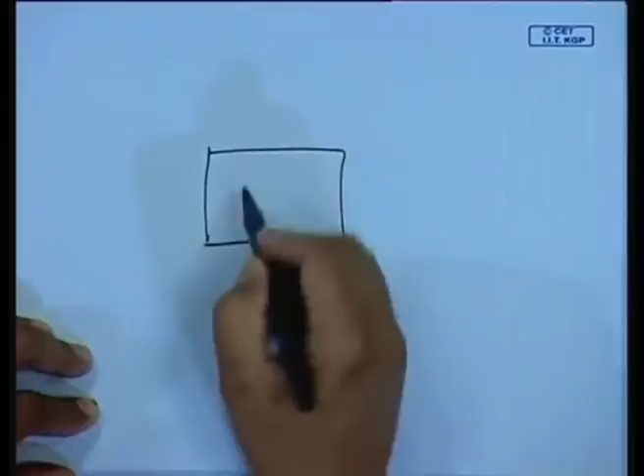I would not like to have a rough machined surface, because my turning machine cannot run at high speeds, so I cannot have a smooth finish. There have been intermittent speed fluctuations in my machine, so these marks are going to stay in your machining process. So even a simple lathe machine has to be taken care of, otherwise if you are doing a machining operation on that lathe, the machine's quality is going to reflect on the workpiece.

We take it for granted that you have a nice machine. Somebody may say this machine has a bad gearbox. Somebody may say, well, what has the gearbox got to do with your tool? You have a new tool, so you should be having nice machined surfaces. But people do not understand that if you have a bad gearbox, there will be backlash and there will be a speed fluctuation, and that is going to affect the cutting process. They are all interrelated. As engineers, I am sure you will appreciate much better that all these dynamics of the machine are interrelated, and they will eventually reflect in the final product which you are producing from your plant.

I would like to have the plant, once up, run till its maximum useful life. And of course, if all my machines are running at their best OEM specs, I will have increased production capacity. I have seen many plants that never run to full capacity because they are not sure about the design capacity of the machine. They would have bought a new machine that says it can be loaded up to maybe 100 horsepower, but they will not load the machine beyond 80 horsepower.

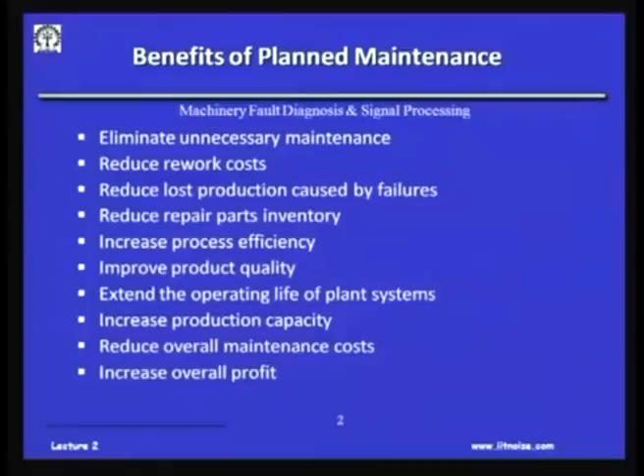They would say, oh, I would not like to reach the high levels because it may damage my machine. So these are uncertainties. They will say that the machine has not been maintained, so I would not like to load the machine and create excessive wear and tear. So again, if this maintenance is planned, like I was saying, the planned downtime, planned inventory, it is going to reduce the maintenance cost.

Reduction in maintenance cost means increasing the overall profit, and the guys in finance will always be happy if the cost for manufacturing a component comes down, because that brings about overall production increase and revenue to the company, and that is what everybody strives for. Why are we doing maintenance? Because I would like to have high productivity at low production cost or low maintenance cost.

When a machine is initially commissioned, the failure rates are pretty high. This could be because of wrong OEM specs, wrong integration, installation defects, not being able to understand the machine, not able to understand the performance of the machine, operators not properly trained. So these are issues

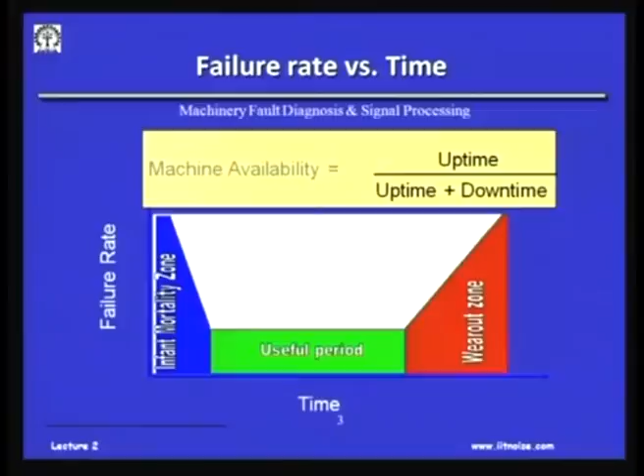There are three very important types of machine maintenance. The first is preventive maintenance, also known as periodic maintenance. The second is predictive maintenance or condition based maintenance. And the last is actually no maintenance, known as breakdown maintenance or reactive maintenance.

In this course we are going to focus on the second one, condition based maintenance. I had told you in the first class that we are gearing towards instrumentation, signal acquisition, data acquisition, and analysis, all because of CBM. I need to know the machine's condition by monitoring its vibration, temperature, pressure, etc. So we need to track fault conditions. We will be focusing on condition based maintenance in this course.

But I thought I should tell you about preventive maintenance or periodic maintenance. Periodic maintenance means I will regularly follow a schedule of maintenance. There will be a fixed time interval. No matter if the machine is bad or good, I don't care, I will just religiously maintain and replace the spares so my machine is always up and running. Particularly in defense, they do this kind of periodic maintenance for strategic reasons, but that doesn't mean they don't also do condition based maintenance.

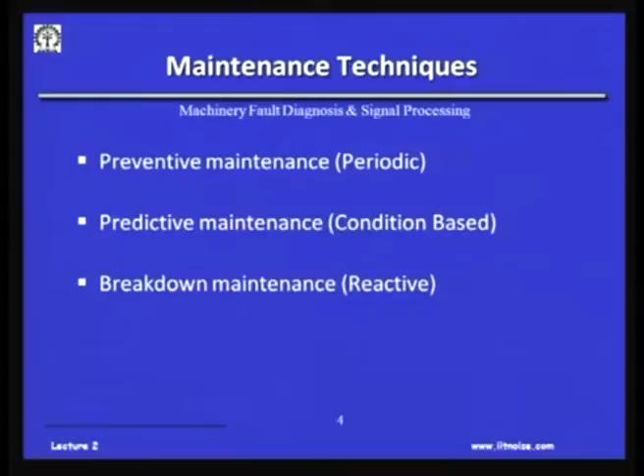Another thing I will tell you, as I mentioned earlier in our meeting: like a doctor is no good to a dead man, similarly a maintenance engineer cannot maintain a machine which is already dead, which is not running. I can at most repair it, but I cannot maintain it. A machine has to be running so that once it runs, it gives us signals. If a machine is not running, there will be no vibration, no noise, no heat generation, so I cannot possibly do CBM on that machine.

At most I may look into the manuals, look into the design, and do a repair, but to implement CBM, a machine has to run, so that it gives the required signals and I have the instrumentation to capture those signals. I'm stressing the words signals and instrumentation for condition based maintenance, because to implement it I need extra investment, even if the machine is as new as one I just bought today. To implement CBM on it, I have to make that extra investment from day one, to cover the instrumentation and the analysis unit.

I have skilled manpower to analyze the signals acquired from the machine. As opposed to the last one, the breakdown maintenance or the reactive maintenance, this is actually no maintenance. I do not do any maintenance on this machine. I can afford to lose the machine if it goes down.

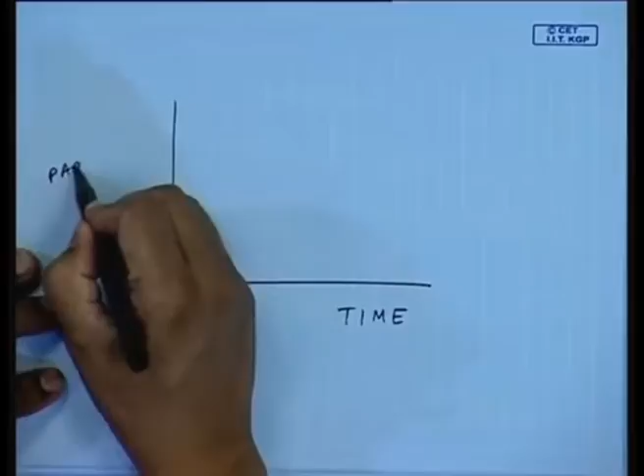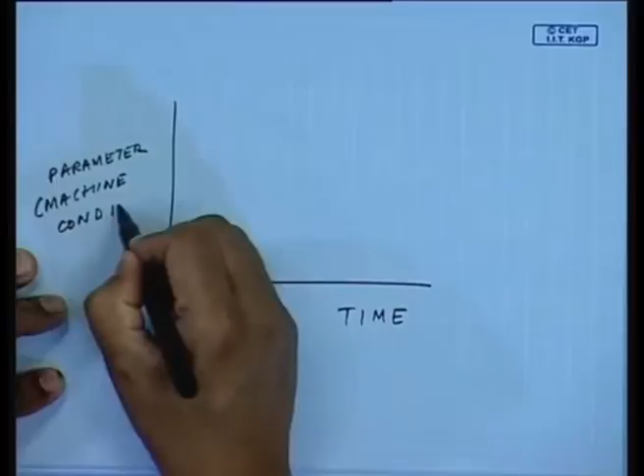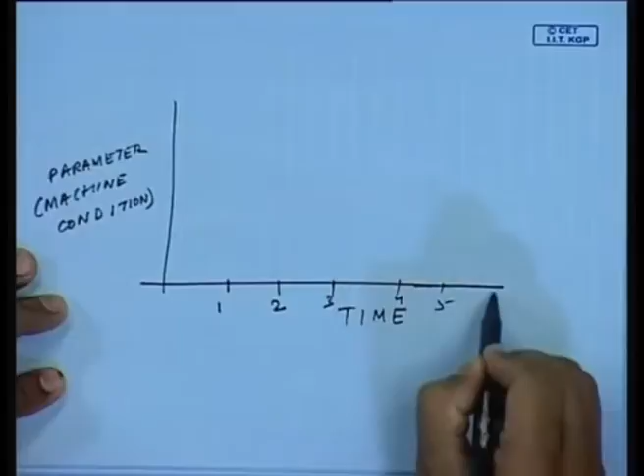Say I have a parameter which tells the machine's condition, for example over intervals of time - 1 month, 2 months, 3 months, etc. So this is time in months. I have measured this parameter, and second month onward, slowly I see this is happening.

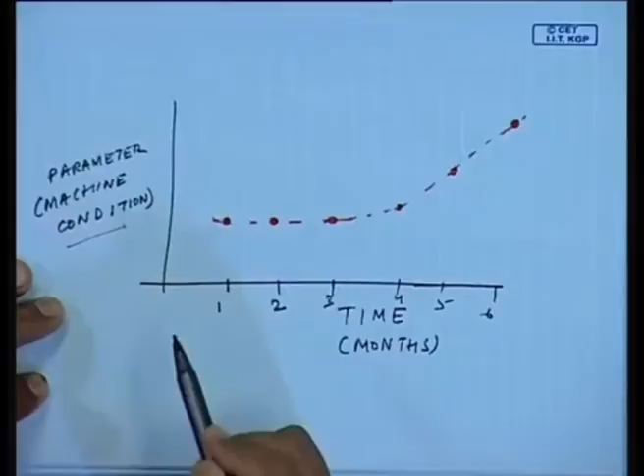So if I was trying to do a trending of the machine's condition towards the 4th to 5th month, at the end of the 5th month, as a maintenance engineer I would be getting worried - something is behaving abnormal with this machine, and why is this parameter going up?

So I know, well, by the 6th or 7th month I need to have a major repair or study into the problem in this machine, so that I may already have certain critical spares available by the 6th or 7th month - rather than storing these critical spares from month 1. If I know it takes only 1 month to get these critical spares, I can plan by the end of the 5th month to get them. That is one way of looking at it.

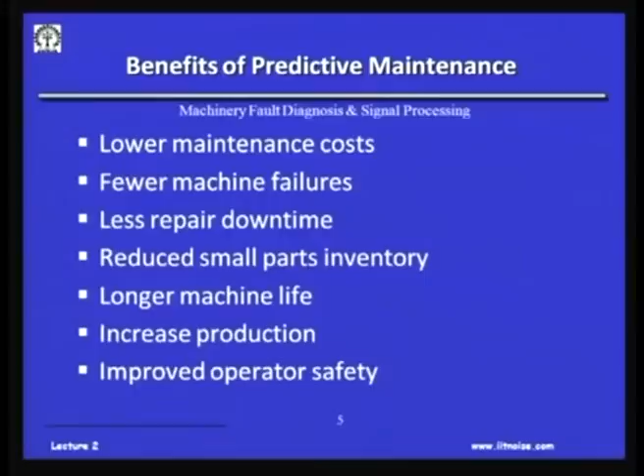And then I can be prepared that my machine is going to have a downtime. I'll give you an example here.

Suppose we have a festival of Dashera, wherein we give holidays to our workers. Imagine at the peak of Dashera, my machine which is supposed to be producing, and there is high demand, has to take a serious breakdown. So I have to pull out my workers or engineers from their Dashera vacations or holidays. I have to pay the workers overtime because I have to pull them out from a scheduled holiday, and I have to have the spares ready. So all this adds to cost.

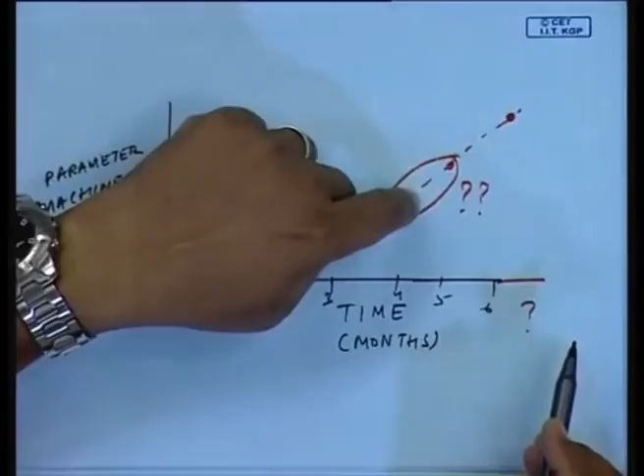But had I planned it earlier, because I know the machine's condition, at the end of the 4th month I know I'll have a high production demand toward the end of the 7th month. This is the time wherein I can take a repair instead. So these are the cases wherein I can reduce my inventory, and if I do a proper planned downtime, I can increase the machine's availability and production.

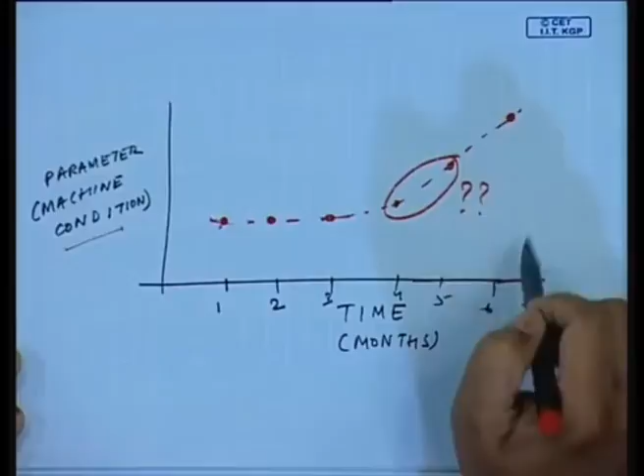And if I know this machine is going to have an abnormal behavior, I would not like my operator to be very close to the machine. I have had a case wherein we have a plant very close to Kharagpur, in Haldia, of a large FMCG manufacturer.

One night the plant engineer gets a phone call that the gearbox blew apart. This is a plant which produces detergent. Detergent production is very similar to cement manufacturing - they have a mixing process, a rotary kiln that rotates at a very low RPM, and it's heated at one end. So if you have a motor running at 1500 RPM and this kiln rotating at 2 to 3 RPM, you can imagine the amount of reduction being brought about in this gearbox.

This gearbox was very critical to that detergent plant. And this gearbox, for reasons we will find out later on—in fact that's a case study I will discuss towards the end of this course—blew up. Imagine if the operator was standing next to it. Unfortunately, it was in the late night shift and nobody was there. Imagine if an operator was standing next to it, it would have been dangerous. So if we know the machine's condition, we know when it is safe to go closer to the machine while it's operating.

So all these are the benefits of predictive maintenance, and in this course, as I was telling, we will be focusing more towards condition based maintenance.

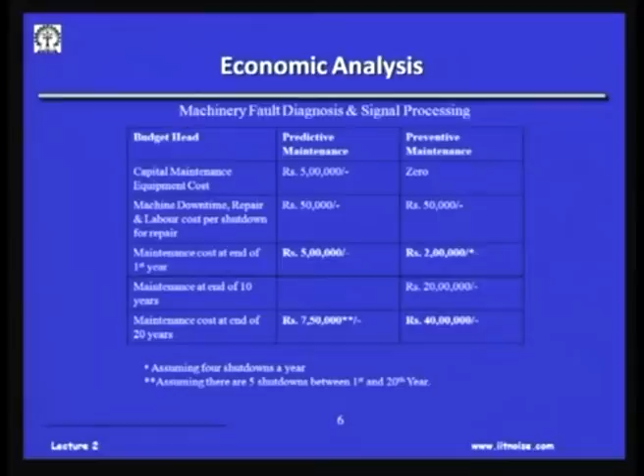But we always have a problem with maintenance engineers asking management for more investment right on day one, because management would obviously say, well, we have just bought a new machine, why do you require an additional expenditure of 5 lakhs for maintenance? Because from day one I need to do predictive maintenance so that I have the right equipment and infrastructure to acquire the signal and know the machine's condition. That is why this 5 lakh has to be spent on day one. But in the long run, we save more than about 32 lakhs in 20 years if you do such an accounting.

In fact, nowadays—I'm telling you the scenario of the Indian industry, there are many plants. I'll just give you examples from the last 2 decades. About 2 decades ago, people hardly knew about vibrations. Vibration was always there, but even in engineering curriculum, we were hardly taught machinery vibration as a full-fledged course.

In the industry, they used to have some meters that just gave you one number, and there were certain ISO standards specifying, for a certain horsepower, what the overall vibration level should be. There used to be just a few people in a maintenance cell—workers and technicians.

They used to go to the machine, measure its vibration, and forget about it. If there was a breakdown, people would blame each other, saying you have not recorded the vibration. They used to go back to their old log books, torn, with pages flying here and there. This was actually the scenario 20 years ago.

When people used to call me to the industries to fix their problems, I used to ask them, do you have any vibration data? They would show me old log books, written sometimes by pen, sometimes by pencil, and sometimes they do not know in what units they recorded the data. I have seen they put the transducer in the wrong place, they do not know if there was a proper battery in the meter, they just see some display and write it down. There was no calibration of the meters. This was the scenario 20 years ago in our Indian industry.

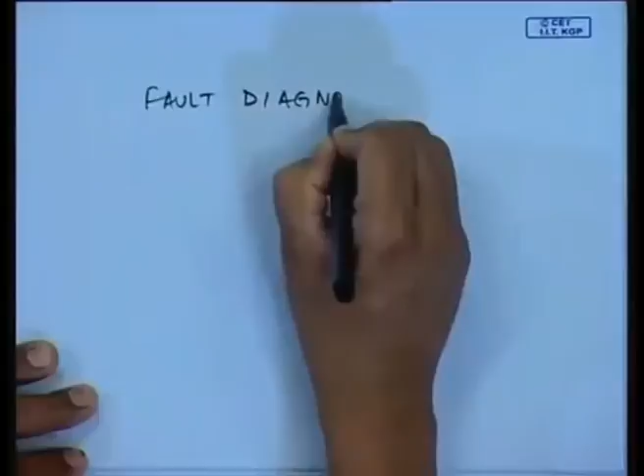In fact, nowadays we are talking about predictive maintenance. The focus has been, if there is a problem in the machine, to know what is creating the fault in the machine. Next, there are mathematical algorithms to find out the remaining useful life of a machine, and that is very important. Obviously, to an engineer, the very next question is, my machine is running fine, when is it going to go down? That is the question everybody asks.

Your management would ask you, can my machine survive for the next 10 years? And how would you answer that? You have no clue. All you know is you have data till present from the past 10 years. So there are a lot of mathematical tools and models available which will let you know whether your machine is going to survive for the next 10 or 15 years, or when it is going to have a condition wherein the machine will be totally unacceptable. So you can all understand the benefits of predictive maintenance by the small example which I showed you.

Now, what are the techniques available for predictive maintenance? As I was telling you, you had some idea about these techniques. In the last class, I told you that 70% of the cases of predictive maintenance is by vibration monitoring, followed by wear, debris, and oil analysis, which is the remaining 20%. Then comes motor current signature analysis, thermography, and NDT techniques, which make up the remaining 10%. I will give you an example on thermography.

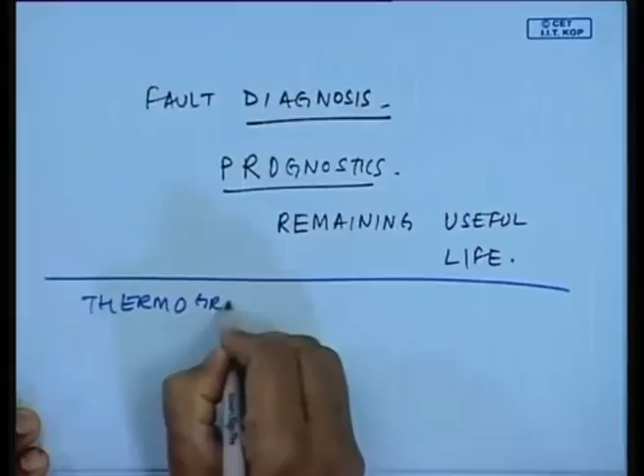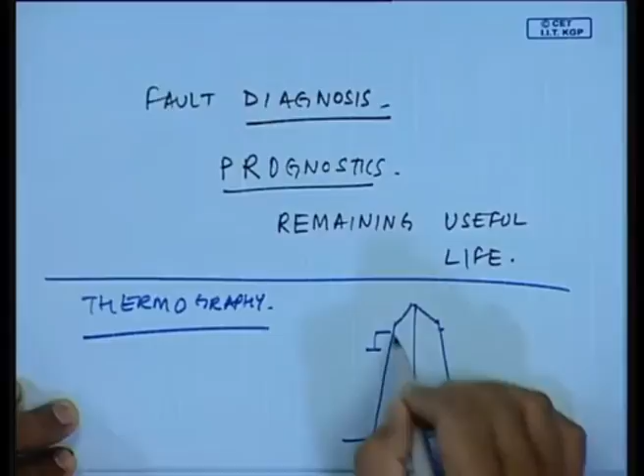I will tell you an example which the industry nowadays is using to save power lost during power transmission. Consider high voltage transmission towers, where they have certain switch gears. They will be operating a switch gear, and suppose from one transmission tower the line goes to another grid, they will have switch gears, and this switch gear has to make contact. This is high from the ground, and you are standing somewhere here. Obviously this could be 25 kV, 33 kV, or 132 kV lines, and they are transmitting electrical power.

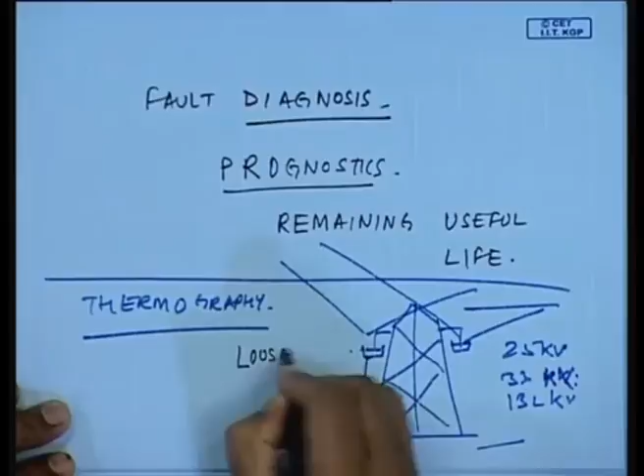Now imagine in this switch gear, if there was a loose contact, because of the loose contact there will be arcing and heat generation, and there will be a loss in power transmission.

This is a case study reported by Andhra Pradesh State Electricity Board. I was in one of their FICCI meetings, and they mentioned they had done substantial power savings in power distribution by ensuring there is no loose contact in the switch gears at such high voltages. How did they find out about the switch gear loose contact? Obviously, if it's a high voltage power generation, I cannot physically climb up the tower and check with a measurement.

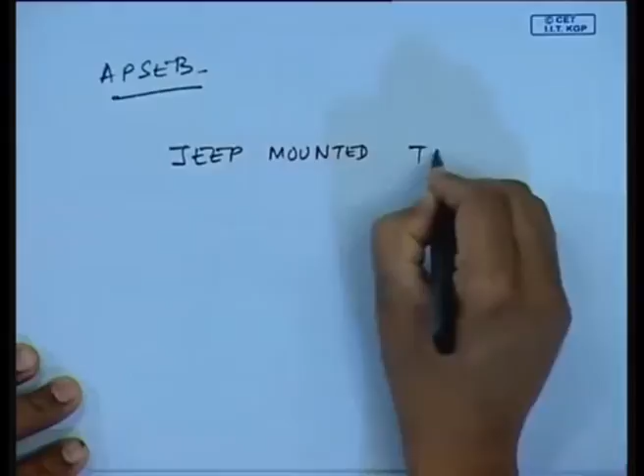What they did was use a jeep-mounted thermal imaging camera to shoot at the switch gear and find out the hot spots. The electricity board reported to FICCI that there is a lot of power loss in the transmission itself, not in generation, and loose switch gears were a very large component of this loss, which they could reduce by doing thermography.

We use thermography in detecting faults. We may not be able to diagnose a coupling misalignment between a pump and a motor directly, but if there is misalignment, I can put a vibration transducer, measure the vibration, do an analysis and tell there is a misalignment. Offhand though, just to know if there is a coupling misalignment, I will shoot the camera on the coupling. If the coupling is hot, I know something is wrong. So I can identify hot couplings, hot bearings in the case of a railway axle, and hot conductors behind a panel.

For example, a ship comes to port for a few days for overhauling. I obviously cannot remove all the claddings and panels to see all the conductors and check whether anything is hot. You can just do a thermal imaging scan and find out the hot conductors, then take corrective measures. Thermography is a very quick and easy way to detect abnormal heat changes, which could be due to misalignment, loose contact, or high current flowing in the conductor, etc.

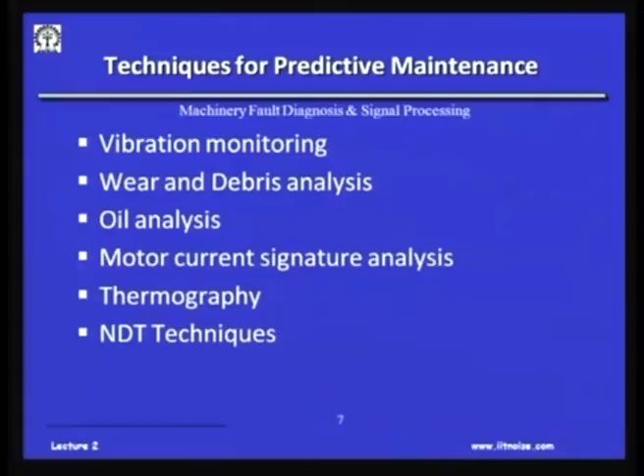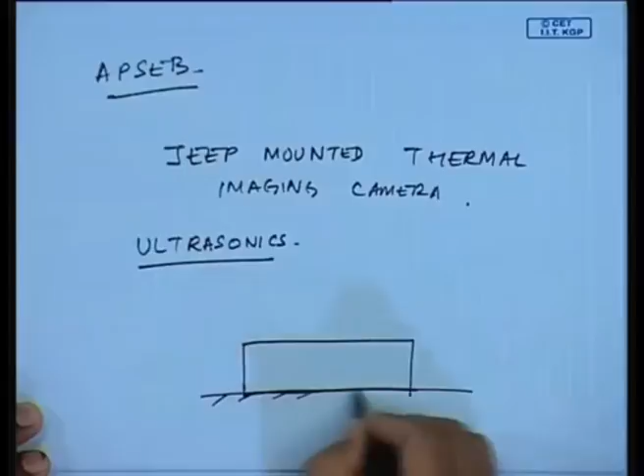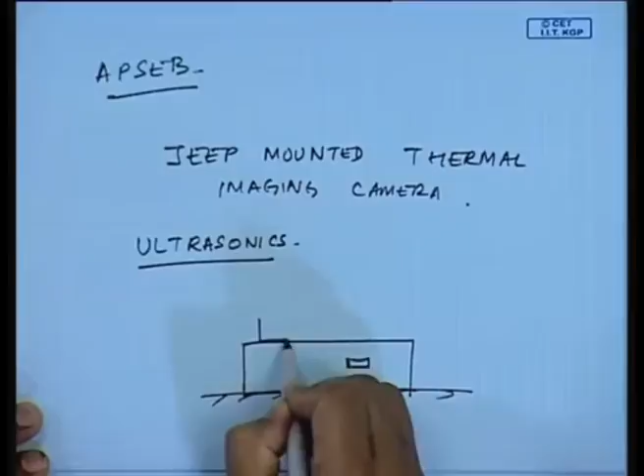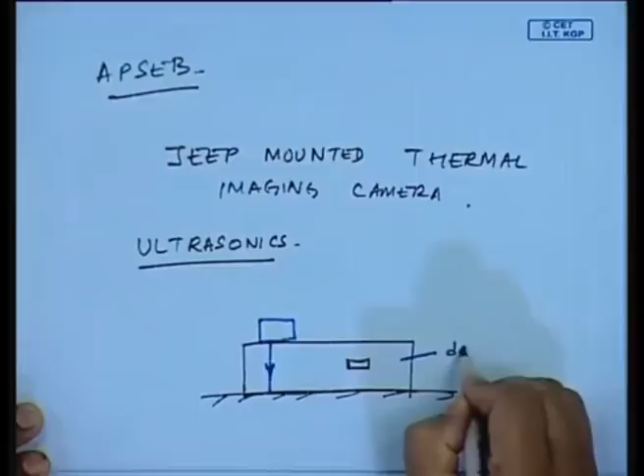Ultrasonic testing is very popular. Let me give an example. Say I have a metal piece and there is a crack or void here. If I have an ultrasonic transducer, it gives out a wave, an incident wave, into a denser material. This is of another material, so there is a density difference at this interface.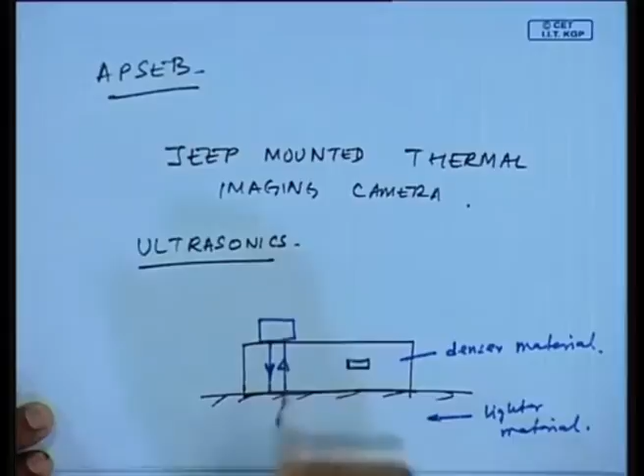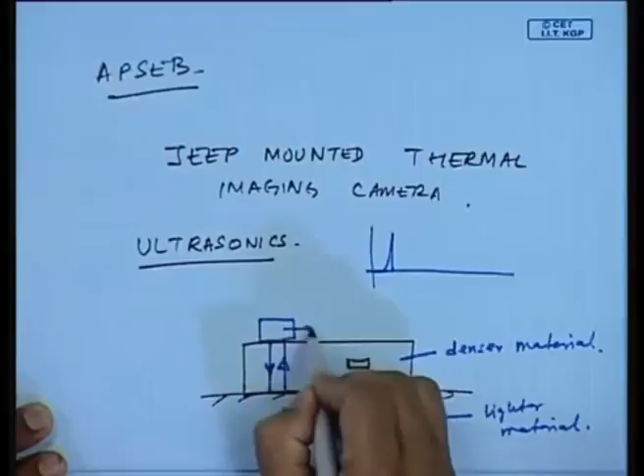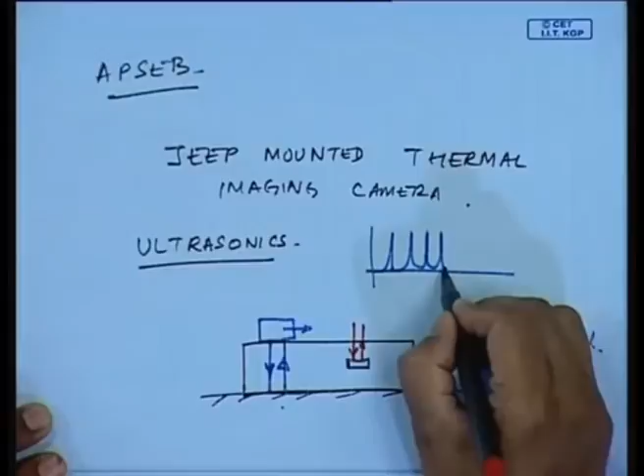Because of this density difference, there will be a reflected wave, so in this transceiver you will see a pulse. If you move this transducer, every instance you will see a pulse, intensity equally spaced. But when the scan comes right above the pocket or void, because of the density difference, the wave is going to bounce back, so you will suddenly see a very close spacing - this is time, this is some voltage level. This means the time taken is less because the distance travelled is less.

This means it came across an obstacle of a different density than the common homogeneous material, and that is the principle behind ultrasonics.

Ultrasonic waves are, as you know, high frequency, and they are very directional, because high frequency waves are directional. Like a siren - if there is a siren at high frequency, you always turn your heads towards it, because high frequency sound or noise is directional. Same is true with ultrasonics.

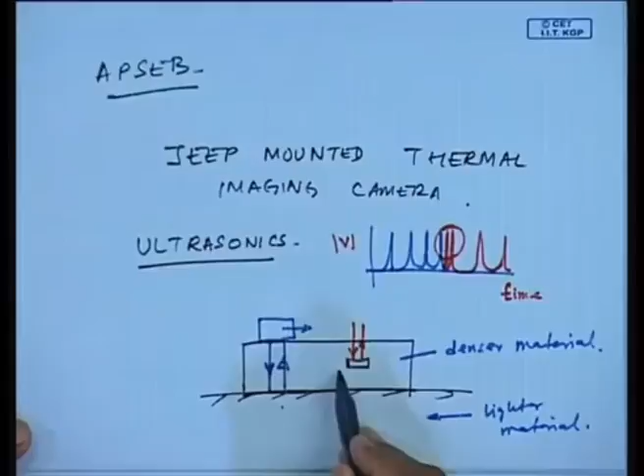So, if I have an ultrasonic scanning of this, I can do that. In fact, the ultrasonic thickness gauge is based on this principle. If I know the speed of the ultrasonic wave in this medium, I can calculate, from the time taken, the distance or the thickness of the specimen.

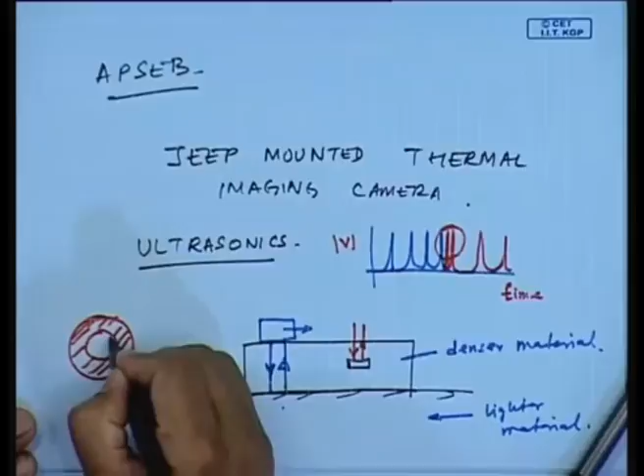Ultrasonics are also used to find out issues in large tubes of certain cross section. Whenever they carry a lot of chemicals, things get deposited or clogged. Because of this clogging, the thickness as measured here - suppose originally this was 10 mm - will vary over time due to deposition of solid particles. If you rove an ultrasonic transducer all around the circumference of this tube, you will know the internal condition, which is not visible and cannot be measured by vibration monitoring. By roving the transducer around the circumference, I can know if there is any formation or deposit on the inner wall of the tube.

People also use radiography, X-rays, as another way of doing it. So there are many ways to do such NDT techniques like ultrasonics, acoustic emission, radiography, etc.

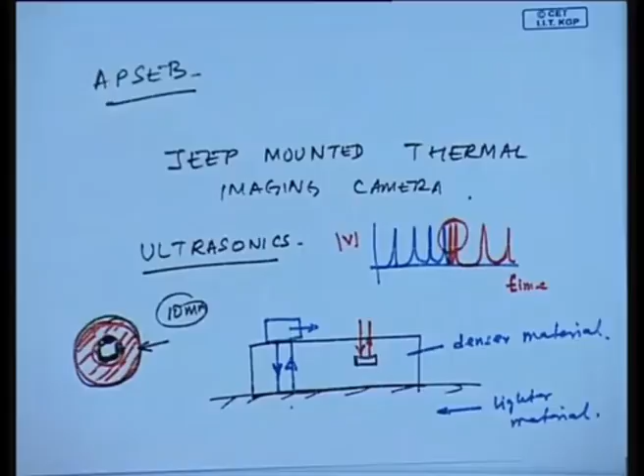These transducers could be, for vibration it is accelerometer, and for wear debris it is the spectrophotometer, because the wear debris falls off the parent material. By knowing the wear debris chemical composition and comparing it with the chemical composition of the parent material, I can know which component has worn out and because of which this particle has deposited in the lubricating oil.

This is done with a specialized equipment known as a spectrophotometer, and spectrophotometers are very expensive equipment. They require specialized facilities to operate, so obviously I cannot be putting a spectrophotometer next to a gearbox in a cement plant. Spectrophotometers are in dedicated central research facilities.

In IIT Kharagpur, we have several of them in many departments, and all we do is bring in the oil sample. Through a spectrophotometer, we can know its chemical constituents - the composition of the wear debris particles, as to what percentage of iron is present, what percentage of zinc, copper, etc. Then we always compare with the chemical composition of the parent material, and if zinc is in that component and I have a strong amount of zinc in the wear debris, I know that parent component has worn out.

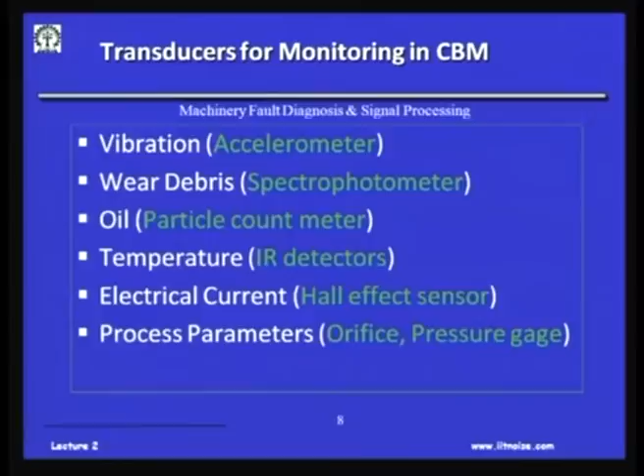Now you have a fairly good working idea about the components in the predictive maintenance system. We of course need to have the machine, we need to have the transducers, we need to have the data acquisition unit, we need to have the computers where the data has to be stored in a database, and we need to have skilled manpower and an analyst who will analyze this data.

So a very generic predictive maintenance system will have user friendly hardware and software. Hardware could be the transducers for measuring vibration, pressure, process parameters, temperature, current, etc. And software which will tell when to acquire the data, how much data to acquire, how long to acquire, and what data to be acquired simultaneously.

So once this software drives this whole thing, this data has to be acquired by a computer aided data acquisition system. It need not be just one data at a time, it could be multiple sensors at all times. I could collect data from all 16 sensors around my machines at one given instance, because there will be a lot of statistical and signal processes wherein we find a relationship between two signals, whether they are related or not. If I do not acquire them at the same time, it is very difficult to tell if they are related, because to be correlated, they have to be acquired at the same time.

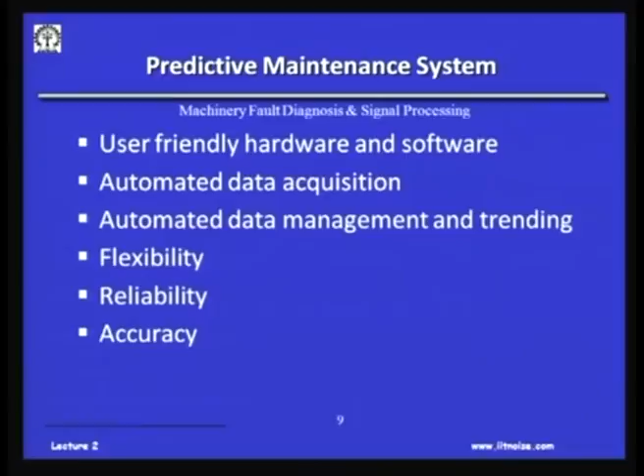So a system has to be very automated, it has to be flexible, and of course it has to be reliable. Garbage in is garbage out - if I give junk data to my computer, it is going to give me junk output. That should not happen. And for reliability, it has to be accurate, the transducers have to be calibrated, and it should not give any false trending and so on.

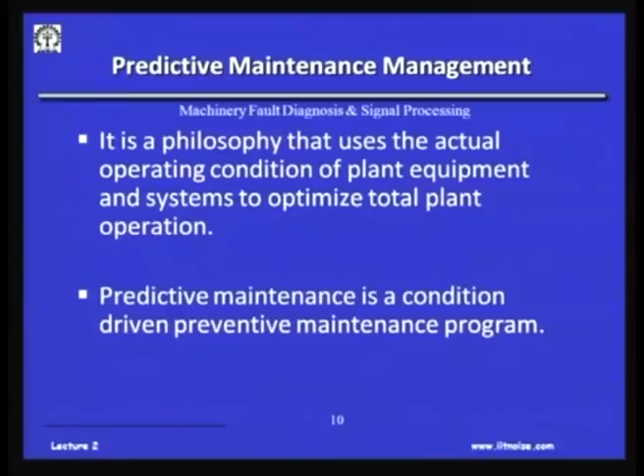So coming to a close, I would say predictive maintenance management is a philosophy that uses the actual operating condition of a plant's equipment and systems to optimize the total plant operation. It uses the actual plant operating condition, it cannot be of a dead plant, and it is a condition driven preventive maintenance program, wherein in predictive maintenance we assume that the machine will degrade - sometimes because of some slips unnecessary repair may be done, but downtime can be controlled.

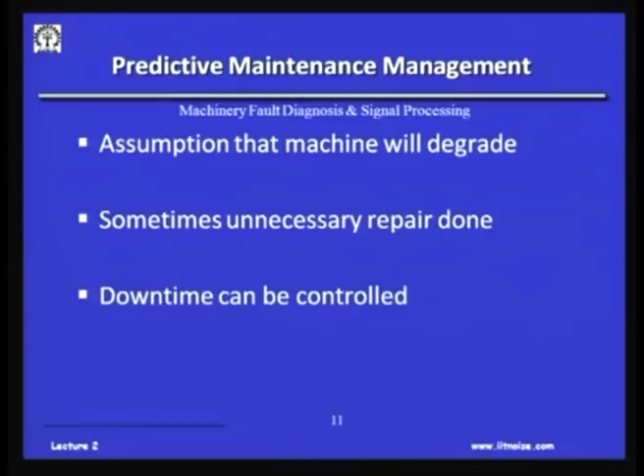Whereas in reactive maintenance, because I have done no maintenance, suddenly I have high expenses involved, high spare parts cost, high overtime, because on a rush day I have to repair this machine - spares not available because the machine has suddenly taken a breakdown, I have to import it. So these are the disadvantages of reactive maintenance.

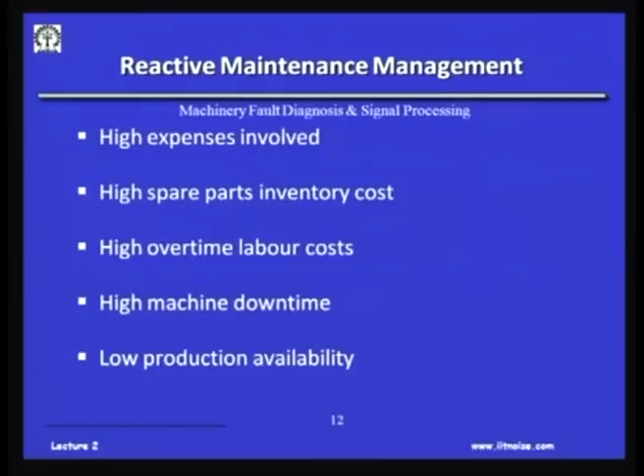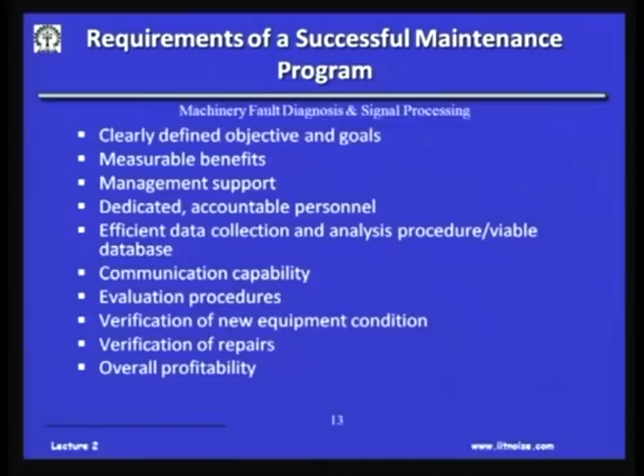So to have a successful maintenance program, I need to have dedicated manpower who understand the entire process, and there has to be good communication between the place where I am taking the data and where I am doing the analysis. I sample oil from one machine, and the technician on the other end thinks it's machine B, where you took the data from machine A. Labeling and data communication between the labs is very, very essential.

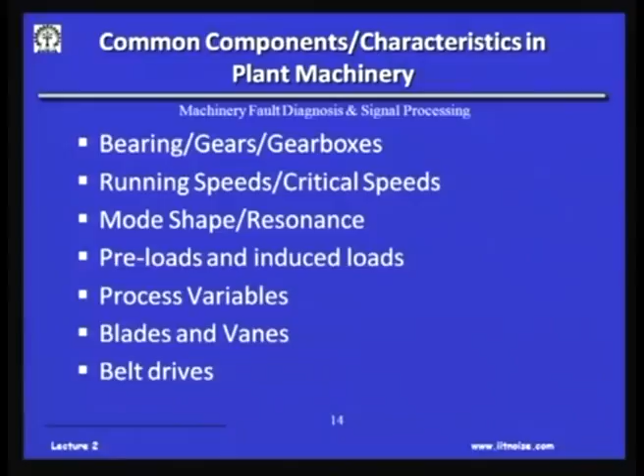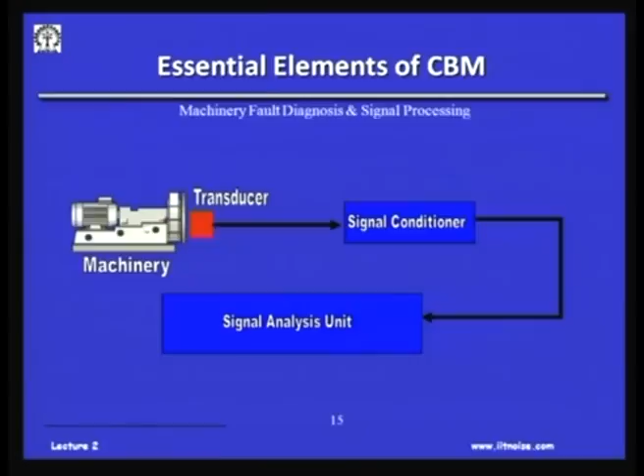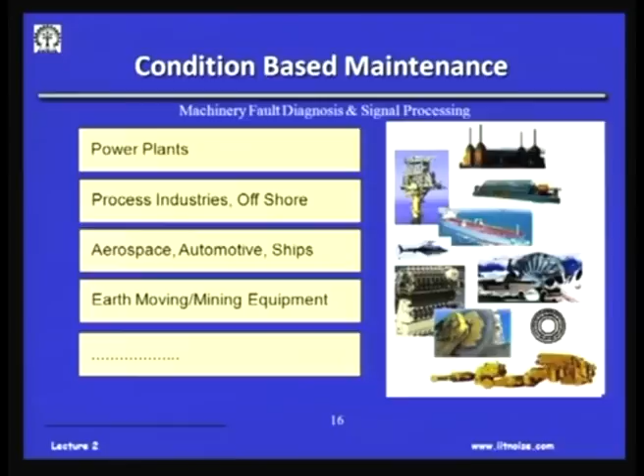So some of the plants, as you all know by now, have these common elements in the plants and machineries which we will be talking about in this course, and this is the generic arrangement of CBM - the transducer, signal conditioner, and the signal analysis unit. CBM is almost used everywhere, and in subsequent classes you will see how we use them for different machines. Thank you.